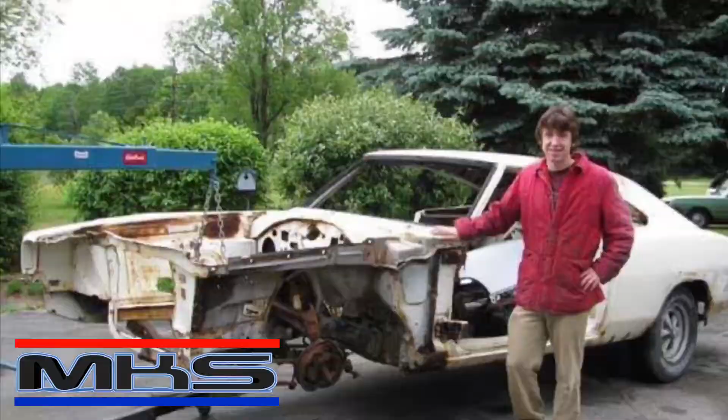I'm Mike and this is My Car Shop. Working out of a 100-year-old refurbished barn, bringing 35 years of experience to projects considered beyond repair. Vision, creativity, and problem solving are essential tools in this place. Watch as we transform junk into polished metal miracles. This is My Car's Shop.

Way back in the day, when I was out of high school but working in the public school system as a custodian, I was driving a 68 Dodge Dart GT that had a 73 318 in it, and a local gas station was selling 104 Octane Cam 2. So my thinking was, of course, I want to make my car faster. Of course, with the word racing in front of fuel, it has to make my car faster. So I went over and put it in and pumped in 5 gallons at that time, probably $15 worth of racing fuel into my car.

My gas tank was really low, so I pumped that in there and was all excited, paid for it, jumped in the car, started it up, was running great, started driving it down the road, got about 2 blocks down the road, and it ran like complete garbage. I mean, like terrible. Smoking, farting, popping, it was awful.

I learned a lesson right then. If your engine's not built for racing fuel, don't run racing fuel in it. I drove around the block, a couple blocks, went back to the gas station and pumped it full of the cheapest crap gas I could get in it to hopefully balance that out. And it ran a little bit better, a fair bit better. Drove it back and forth to work a couple days and just went back to my regular 89 leaded fuel in those days.

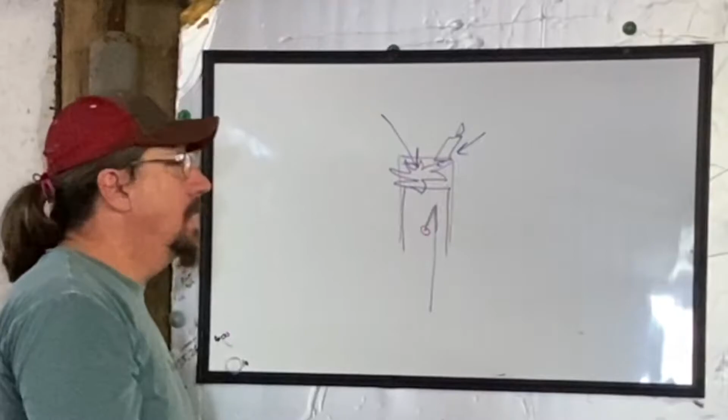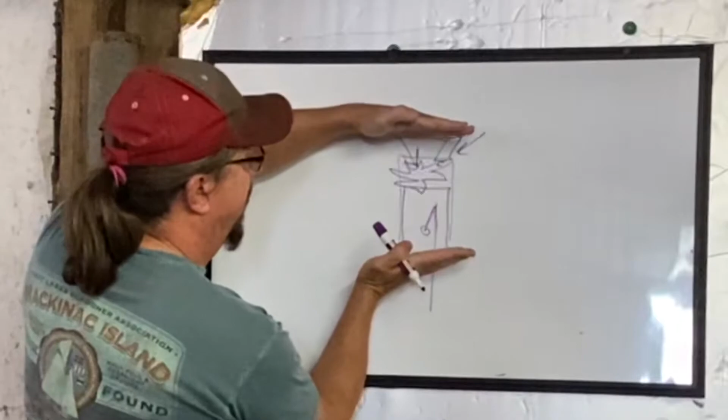One of the things they've done for emissions purposes is drop the compression of engines, and they've also dropped the octane of fuel, which means it's a balance between the compression ratio of the engine. Compression ratio is simply how many squeezes you can get when the piston's at the bottom versus at the top. So the ratio of 8 to 1, 9 to 1, 10 to 1 is how hard it's squeezing that together.

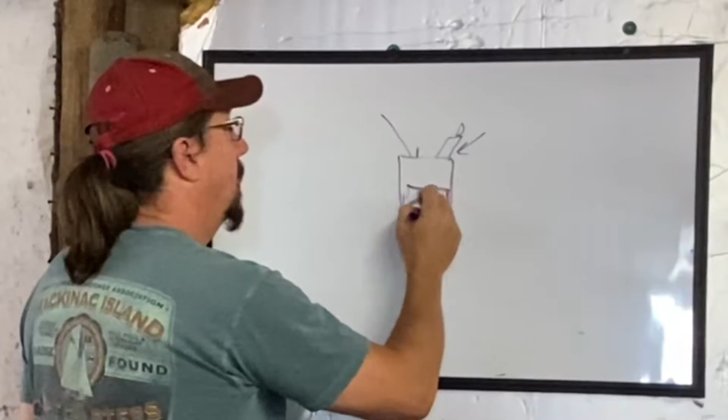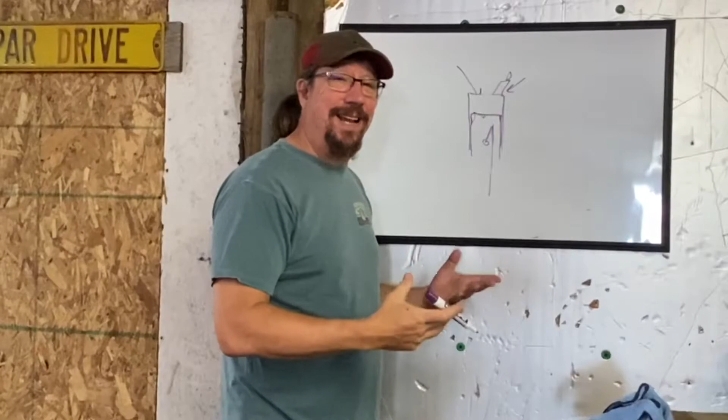The more the pressure in the cylinder, the higher octane fuel is required so it doesn't explode before the spark plug fires. So that's the simplicity of octane, is its ability to resist pre-ignition, or resist exploding like a diesel, basically.

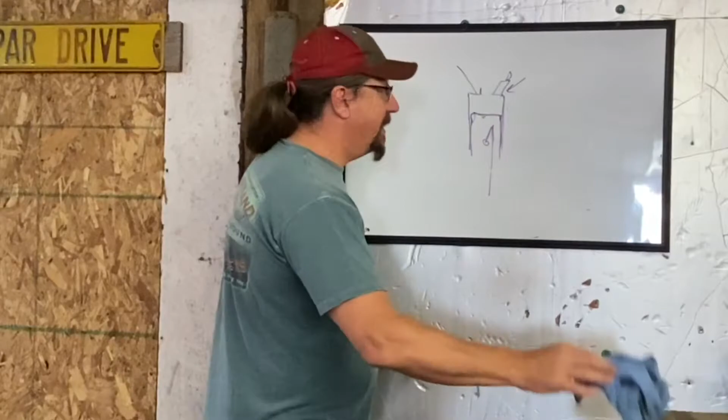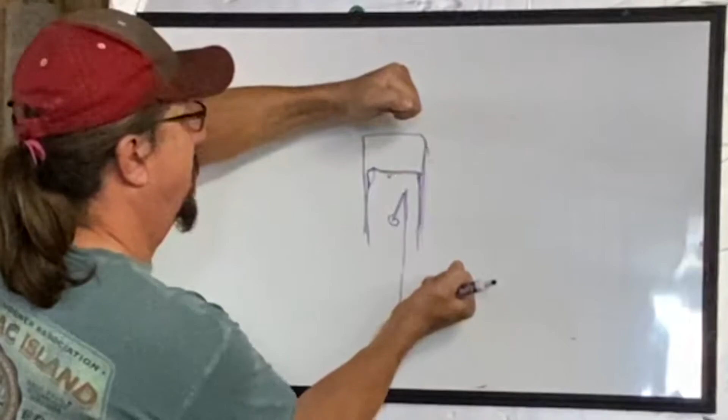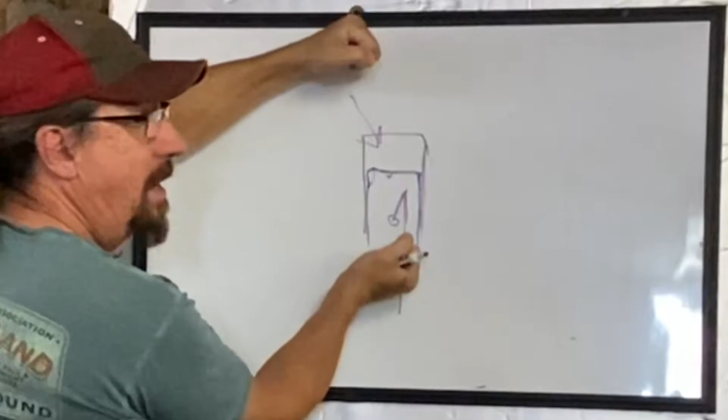So if we take a little segue here and talk about a diesel, it's designed simply to use compression to make the engine fire, it doesn't have a spark plug. So it squeezes things so hard that when the diesel fuel is injected and the valve closes, as the compression builds, it's designed so that at a certain point, when it reaches a certain cylinder pressure, the diesel fuel explodes, creating the power. So it's literally using that pre-ignition as ignition, if you will. Bad words, but you get the idea of the concept.

So of course, in our cars we want to not have that happen. We want to time that with the spark plug so that when the spark plug fires, the fuel-air mixture explodes. Now here's the thing.

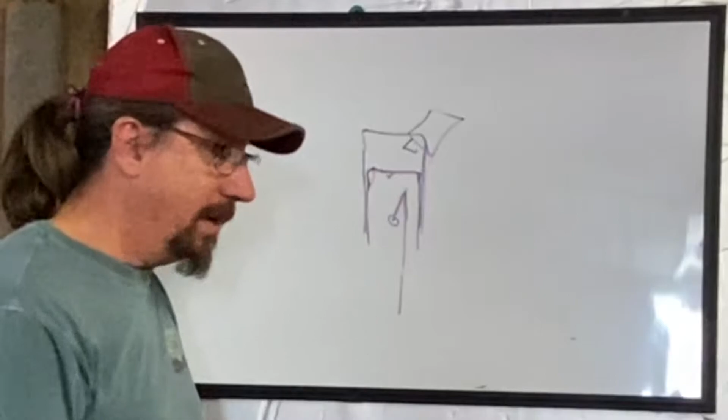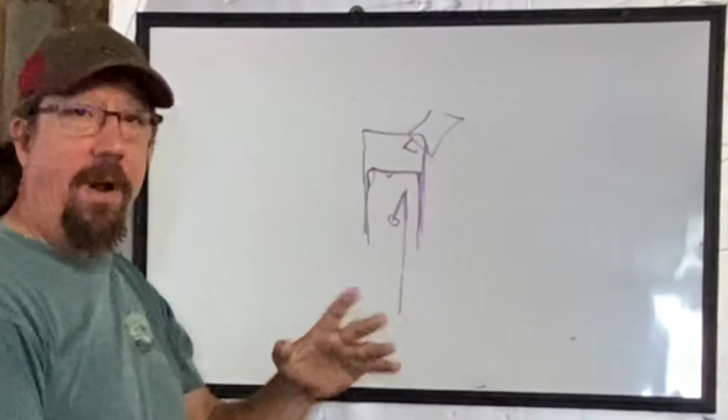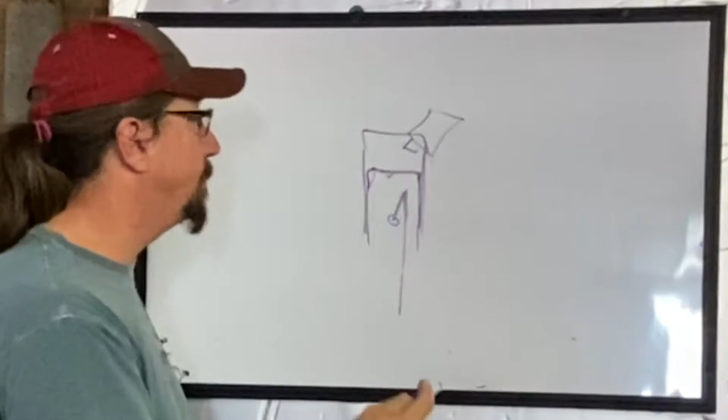Higher octane does not give you more power at all. Octane has nothing to do with power except to prevent pre-ignition, which would actually lose power. So the way you get more power out of an engine is by increasing its compression ratio, or increasing the cylinder pressure.

And when you squirt that fuel in there, if it's not pre-detonating, let's say we have a cylinder pressure of 180 psi, which is pretty high, okay? And you're putting that fuel in there, whether it's fuel injection or carbureted, it doesn't matter. We're putting it in there, and we have a cylinder pressure of 180 psi. What's happening? How do we get more power out of this engine? Why are we getting more power out of this engine than a cylinder over here that only achieves 120 psi? Do you have an answer for that? Stop the video and drop it in the comments right now.

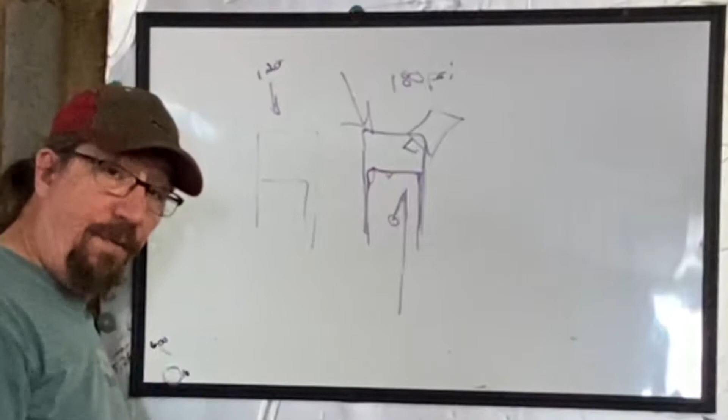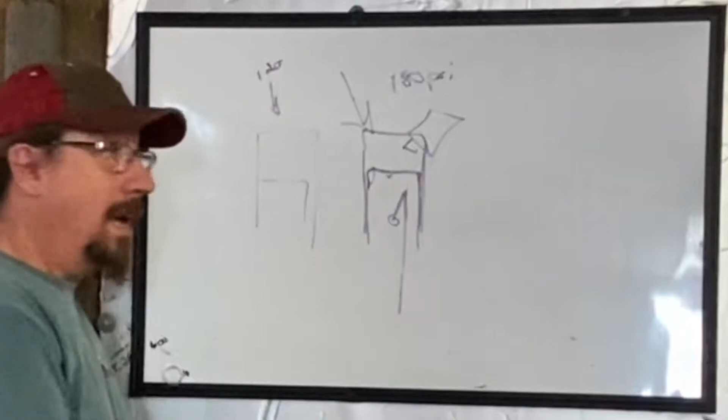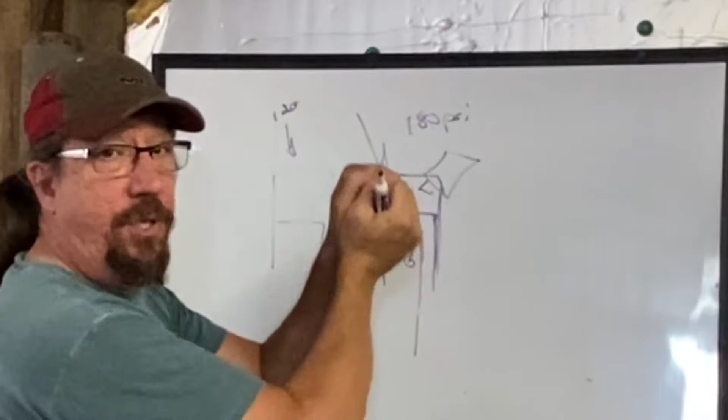Okay, so here's the answer. If I'm squeezing this harder than this one, I'm getting more oxygen in this than I am in this one. That's where your power comes from. So as you're increasing your compression ratio, you're squeezing the cylinders harder and harder, you're compressing more oxygen in there, and then when your fuel ignites, because there's more oxygen, the explosion is more violent. More violent? Violenter? It's badder.

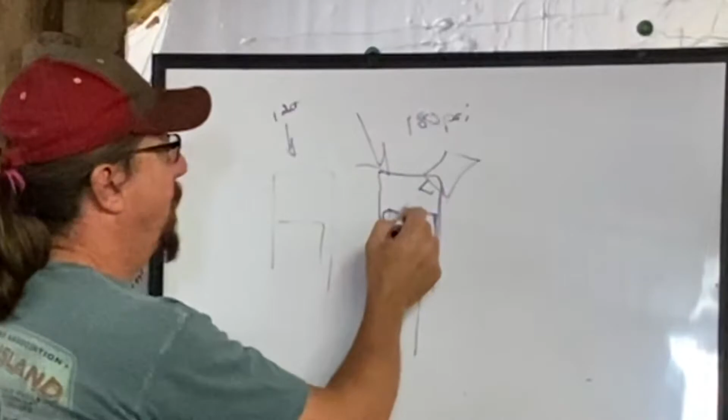So we need a fuel that's not going to pre-ignite at those higher cylinder pressures. Now there's a lot more to this than this, but that's the simplicity of it. So the higher the cylinder pressure, the higher the octane required so you don't get pre-ignition, so that you can get more power out of your engine.

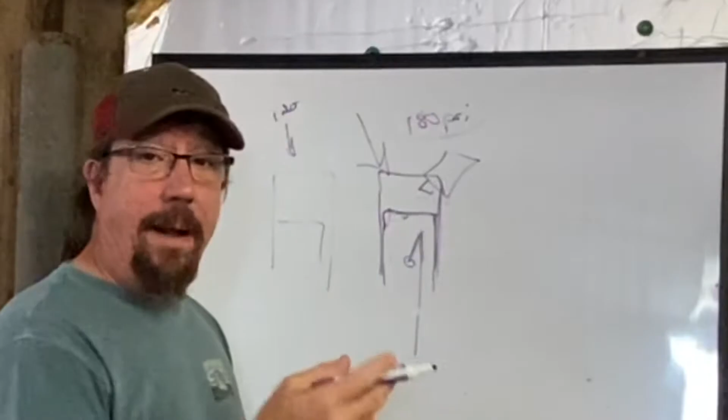Remember that more oxygen in the cylinder equals more power. More power. Right?

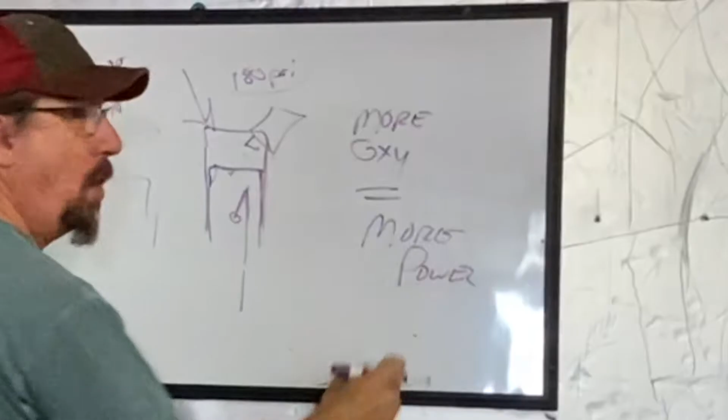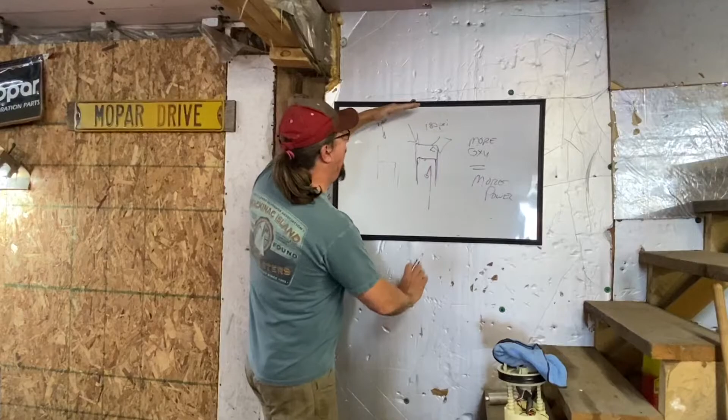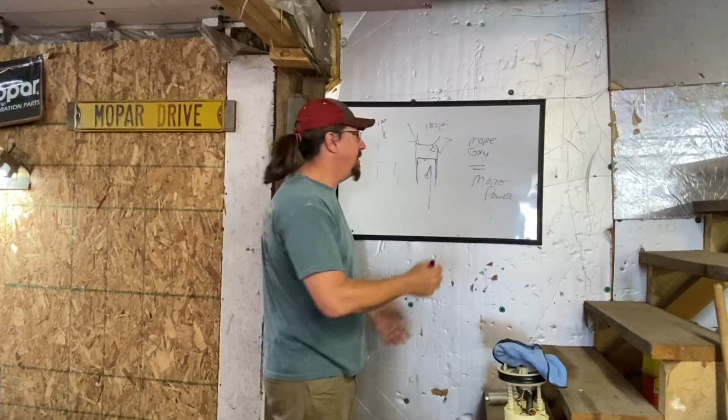So, forced induction, what does that cause? Same thing. You're actually adding air and compressing the air into the cylinder. So when the piston is down at the bottom, before it starts to come up on its compression stroke, a standard engine is basically at 0 psi in the cylinder. Forced induction might increase that to 14 psi when the piston's at bottom dead center, so that you're getting more squeeze out of that cylinder.

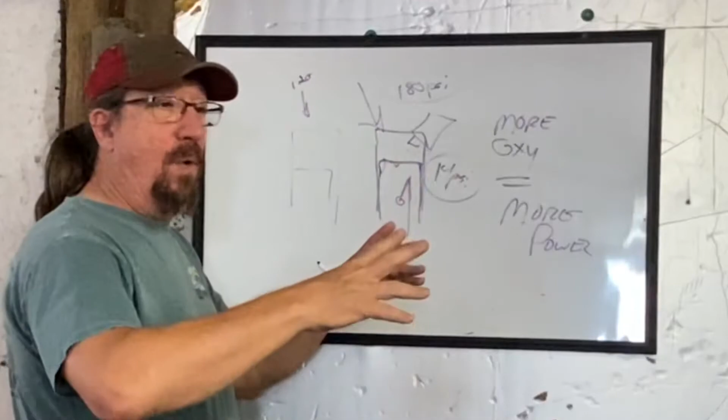So again, then you need fuel that's not going to detonate. You need fuel that's not going to explode before the spark plug fires off, because you figuratively increase the compression of that engine by forcing the air in there, whether that's through supercharging, turbo, or nitrous oxide, and we'll explain those at some point.

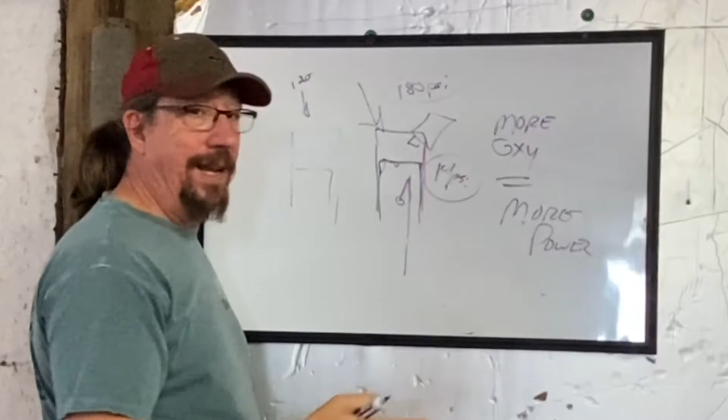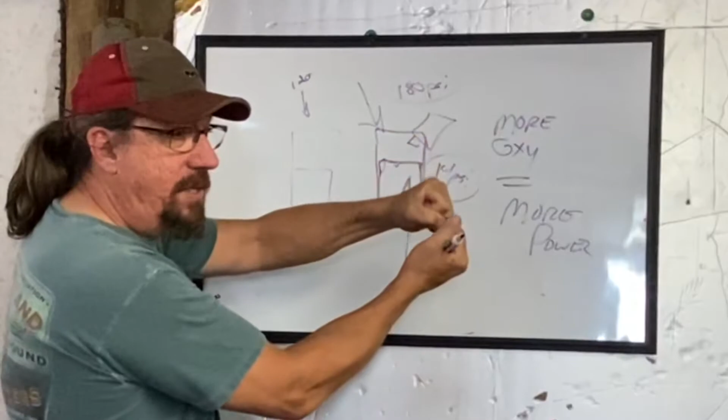But so then again, you need more octane. So again, I've said it many times, but it bears repeating: octane simply allows you to increase the cylinder pressure so that you can squeeze more oxygen to get more power out of your engine.

So in summary, the fuel is not what gets you your power. It's oxygen that gets you your power. So the more oxygen in the engine, the more violent the explosion. Also, more oxygen means you need more fuel to keep it from being too lean. But you're getting a more violent explosion, and that's what matters. That's where you get power.

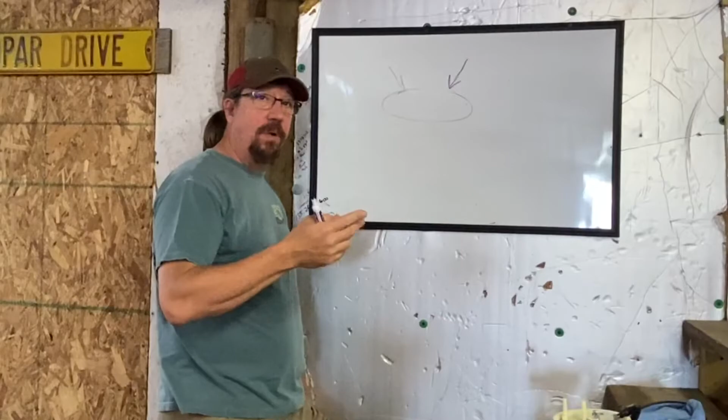So increasing your compression ratio means you need to increase the octane on your fuel so that you can add more air and fuel into your engine, get it to squeeze harder and explode harder and gain more power.

Now, this is a very elementary discussion. I'm not intending to get into the science of it all because, quite frankly, I'm not sure I could do justice to explaining the scientific side of it. But for years, I thought higher octane meant you got more power, and yet I couldn't get more power out of an engine because my engine wasn't built enough to utilize it. That's not true. The octane isn't where you get the power.

The octane is what prevents the fuel from exploding prematurely. It prevents the fuel from exploding prematurely so that you can maximize the power you're getting out of the engine, out of each power stroke.

Well, I hope you found that helpful. I get a lot of questions about a lot of different topics, and I just try to give you some basic understanding of how things work so that you can apply that to your own world, to your own application, to your own vehicle, to your own engine, and help you broaden your knowledge and understanding of all things automotive.

A couple things. Hopefully we'll be back on the 70 Challenger soon. I know you've been getting a little bit impatient, or not impatient, but just wondering. Part of it's been so hot, it's really hard to want to put on all the welding gear and flop around on the floor under this car. As you know, I've also had some physical challenges I've been overcoming, and I'm doing pretty well, and I just don't want to push my luck on that. So I've been doing simpler projects.